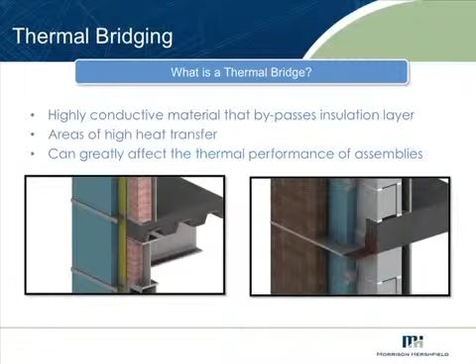Starting off, when we talk about thermal bridges, what we're talking about is heat holes - highly conductive elements that are basically going through the insulation layers on buildings and taking the heat out. If you've got a heat hole, it's kind of like putting a hole in a screen door. You can put a tighter mesh on, but the bugs are still going to get in. So that is the reason we're dealing with this.

Now, when I talk about this, I've been talking about these issues with architects and engineers for some time, and I try to make the point that there's a very big difference between complying with a standard and reality.

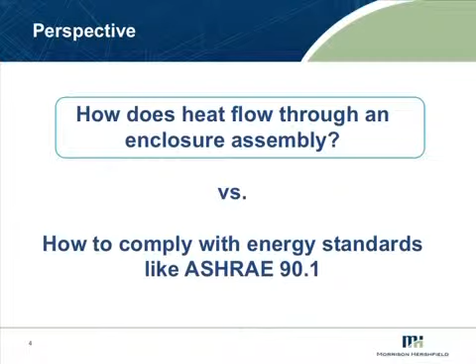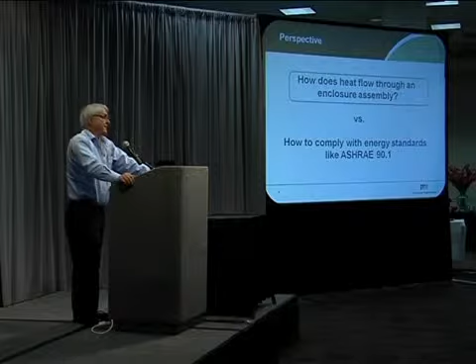To a large extent, I'm going to be talking about science and reality on this, and not necessarily what the words say about compliance with standards like ASHRAE. Clearly there's a relationship, but sometimes the relationship isn't very strong.

This shows in the fact that with ASHRAE 90.1, they basically don't deal with thermal bridges because it was hard. And it is still a little bit hard, but I think we've made it easier. And in fact, they have this 5% exemption - if something is less than 5% of the envelope, you can kind of ignore it. That's not actually what ASHRAE says, but that's how everybody's interpreting it.

And that means that if I put major pieces of steel running through my insulation layer, I can ignore it. Well, you may be fine for compliance, but not for reality. And we are trying to deal here with reality.

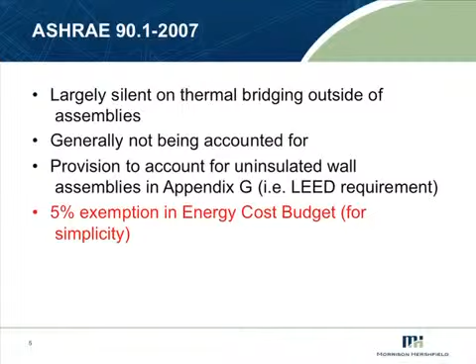There's been a bunch of talk about thermal bridges. Tomas was talking about thermal bridges and things like the psi factor. And maybe by the end of my presentation here, you will be sighing, but I'll try and explain that to you.

Typically, historically, when we talked about dealing with heat load calculations, we had things like the parallel path and the isothermal plane calculation methods in ASHRAE, which kind of work if you're dealing with elements that are relatively non-conductive. Things like wood frame, those kind of methods work quite well.

But when you start with steel and metal and concrete, you find that those things don't work because what you end up having to deal with is heat flow paths that are in 2 and 3 dimensions. Now we have software programs widely available, quite easy to use, things like Therm, which I think Tomas is going to be talking about next, which do 2-dimensional heat flow analysis to try and deal with this.

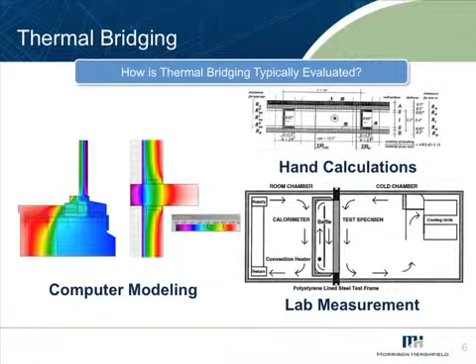But part of the challenge that we have right now is a lot of our details, particularly with steel and concrete, is when we're dealing with stuff that has 3-dimensional heat flow paths, and Therm doesn't deal with that very well.

Now, just to show you some significance as a setup, this is Table A3.3 of ASHRAE 90.1 that talks about what the thermal value, the U value or R value, of steel stud wall assemblies is. And this is one for basically a 16-inch frame wall, fairly common, 3.5-inch.

And basically what it's saying is if I put R13 into the stud space and I have sheathing inside and outside, it's saying I got R8. That's with all the air films and everything else that that wall assembly gives - I assume that I put R13 into steel studs, it's R8.

And then they had that funny term, if you remember on the tables, continuous insulation, which nobody's actually defined very well what it means. But what it says is if I put continuous insulation out here of R8, I'm saying that I'm going to get an R8 plus R8 - I'm going to get an R16 wall, which happens to be the kind of wall you would need for a steel stud wall in Zone 5.

I know Zone 5, I come from Vancouver. It's Zone 5, so you'll see a lot of references to that.

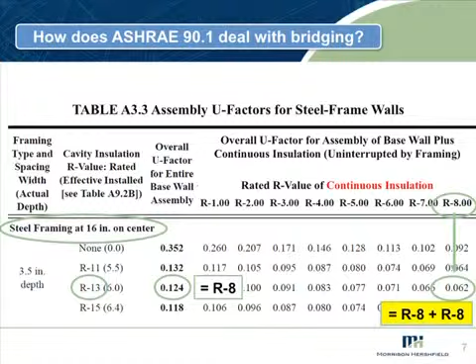But one of the things is that when you start looking at stuff, that gets to be somewhat wrong when you start looking at stuff other than the steel studs.

If you have a very simple analysis, if you just use concrete and tried to do a concrete slab with a wall above and below with an exposed slab edge, the typical way would be to do a parallel path heat flow equation, which would drop you down - if I put an R20 wall with a 6-inch slab, it's basically going to turn it down to about an R12.

Due to the heat bridging through the slab and with the steel stud, you see that it all cascades to the point that when we actually do real U value assessments or effective R value assessments of overall building assemblies, we're much less than those numbers that the ASHRAE tables give.

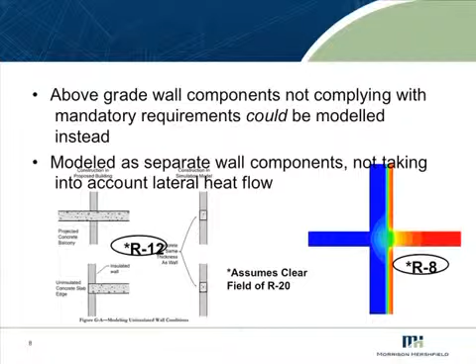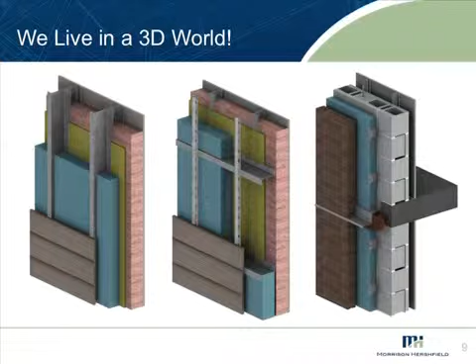A big part of it is because we live in a 3D world. The heat flow paths aren't parallel path. In fact, they're not even a two-dimensional heat flow path, they're three-dimensional. So ASHRAE recognized that, and they threw some money at us and we got some work.

What we did was sit down and try to calculate some common construction details: floor slabs, parapets, corners, window surrounds, base of wall details. Those kinds of common assemblies we have in construction. We looked at masonry construction, steel stud, metal buildings, and a variety of different assemblies.

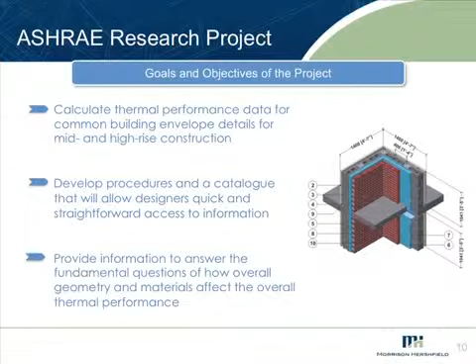Ultimately we did 40 different complex details, many of which included multiples of that, as this particular illustration here shows. We used three-dimensional finite element analysis.

It's actually a Siemens program for those who are real geeks, with an NX or a FEMAP solver. This happens to be the same software they use for structural design on the space shuttle, but we're using it from the thermal perspective.

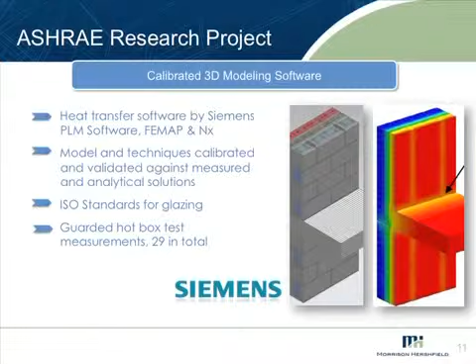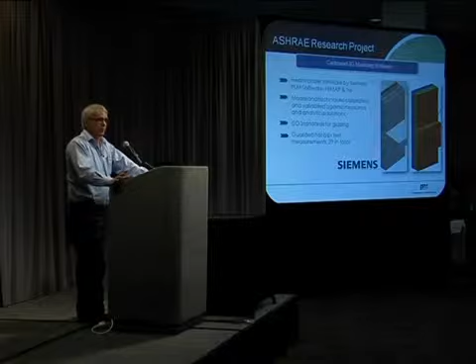We did a lot of calibration work against ISO standards and sets of lab data of known assemblies, and we came to a very close correlation. So we're very confident. There's always, when you're doing simulation, some reason to question it, I'm the first one to question the engineering. But I'm actually very confident that we're in a very close range here in real life. We've done sufficient work to make us confident with that.

We did 40 assemblies. These details are all published. You can get it from an ASHRAE report. It's a published report, and you can buy it from ASHRAE.

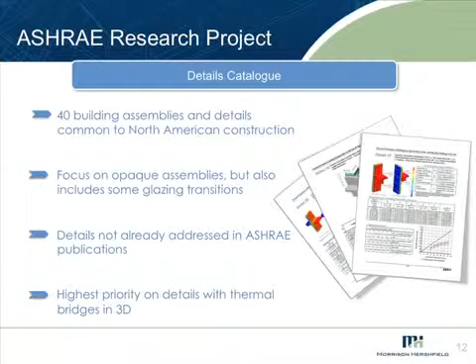Now we did a whole bunch of details. We did precast slabs, we were looking for the details, but interestingly enough we weren't quite sure how we were going to analyze the data before we did all these details. One of the interesting things is that once we got our heads screwed on right and we were doing the analysis, we learned a lot of stuff that's led us to believe we want to do a whole bunch more work, which we're actually looking at right now.

So we did precast details, we did masonry details, we did steel stud details. We did not do wood details. Why? Because we don't think there's a real problem doing the calculations there, and we were optimizing where we were headed. I could even deal with that.

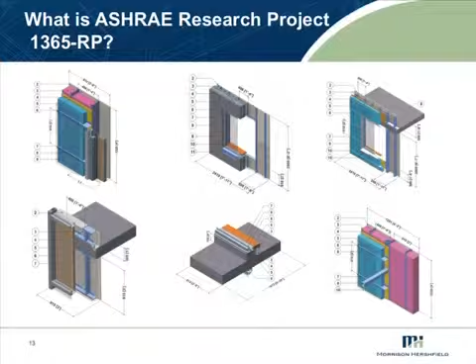Now, you heard the term psi value from Thomas. You're going to get a lot more psis as you look through your future life. Because one of the conceptual breakthroughs we made when we were looking at all this stuff and trying to generalize the results, since nobody wants to computer model every building they do, except perhaps the engineers who do computer modeling.

So what I basically want to get across to you is that you can think about the impact of thermal bridges in three categories. There are ones where the thermal bridges are so widely distributed that you actually want to modify the U value to get an overall U value of a wall or roof assembly. Then there are thermal bridges due to some linear assembly, think of a slab edge, a corner, a parapet, where it's smarter to understand how much heat loss there is per linear element.

The Europeans have been doing this in standards for a while, and they call that psi. It's another Greek letter, and that scares people, but it's really just linear transmittance. So instead of being based on area, it's based on the line. And if you go really smart, 1, 2, 3, well, I can even make it a point transmittance, and they have a term for that too.

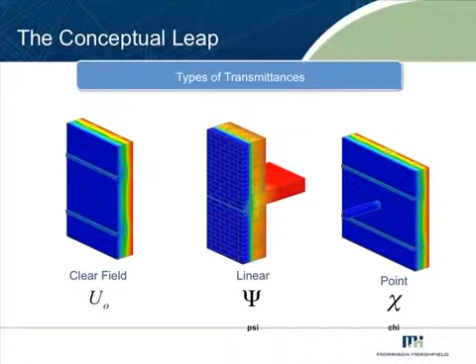It's called chi, right? Well, let's forget the Greek and use a linear point transmittance in terms of those details. Now the beauty of this is if you have a complex three-dimensional model that calculates heat loss, you can draw up an assembly in 3D, run it through the program, and get the heat loss through that whole assembly. Then I can do the same thing with the same type of system that doesn't have that element, in this case a slab. What's the difference?

That's the heat loss due to the slab. Now, what we've typically done in North America is try to attribute that to some set area of the wall, maybe a wall height or two feet. That's been the way we've been thinking, to modify the U value.

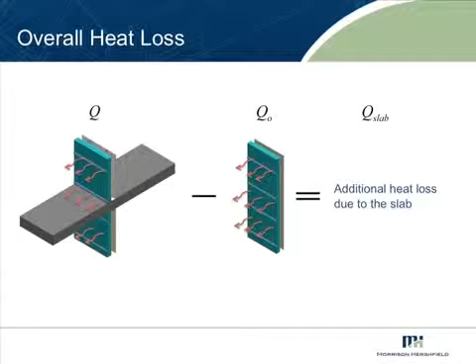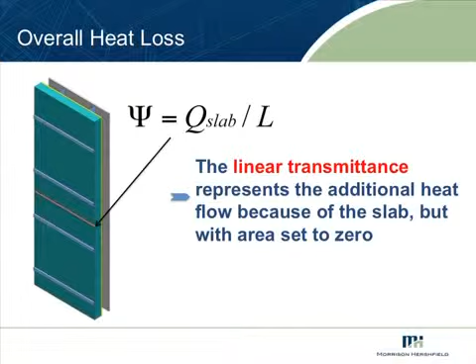Well, the beauty of what they've been doing in Europe is they say, forget that, why use area? I will ascribe it to a line that has no area. So when I want to find heat loss in a wall assembly, I look at the U times the A, that's the stuff for the clear wall without that assembly. Then I do the sum of my psi values, or linear transmittance values, multiplied by the number of linear feet of that particular assembly.

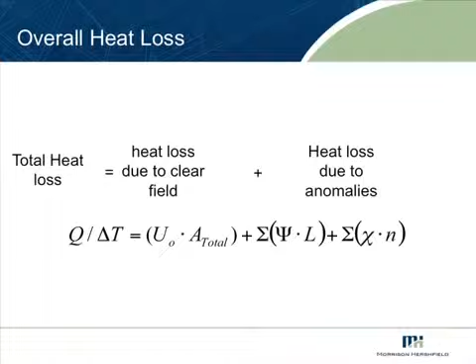And if I have anything I have to count, like a structural connection coming out of a roof to carry something, or out of a wall to carry a canopy, you just add them up. Once you add all that, you get the overall heat loss. And if you want to, you can divide that by the area and get the U value to plug into your program.

Or, more importantly, I strongly suggest that anybody doing heat loss calculations and takeoffs on buildings doesn't do that. They should carry the number with the heat loss due to those linear elements, because you'll see how big they are. We'll talk a little bit more about that.

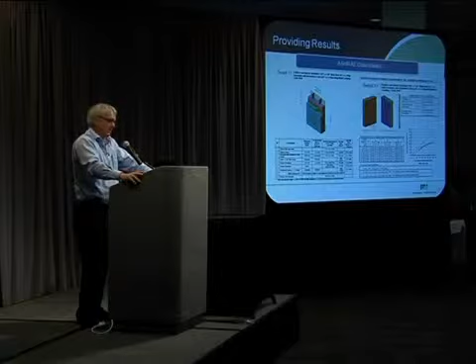So anyway, getting back, if you guys grasp that concept of using the linear transmittance and the point transmittance as well as the UA, I've done my job here. I go home happy, right? Because that is a breakthrough that I think we have to make in North America. So the only reason I'm talking here is I'm becoming an apostle of psi, right?

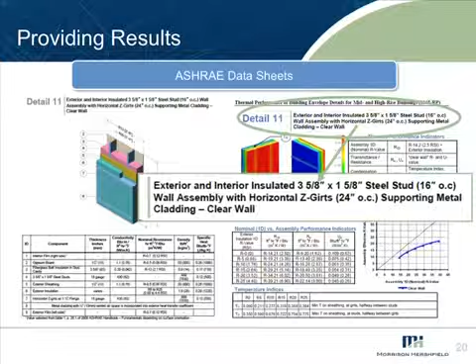But what I do have is, with the ASHRAE report, one of the things we did is we have these 40 assemblies. This happens to be a data sheet from one of them. We've got numbers here, information on temperatures, information on U values, information on the psi value and the chi value. Here's an example, a system.

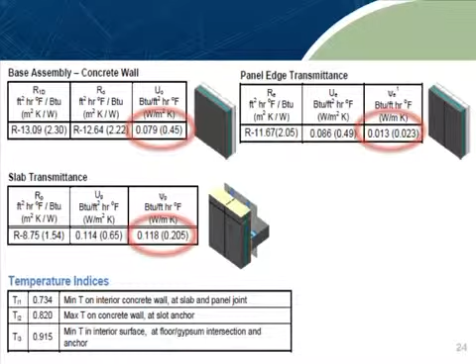The way we dealt with temperature is Thomas came up with a number, using I think it was theta or whatever. But we use the term in Canada, our temperature index. You probably, when dealing with windows, are used to doing the condensation resistance factor. That's just the temperature index. It's dealing with the surface temperature.

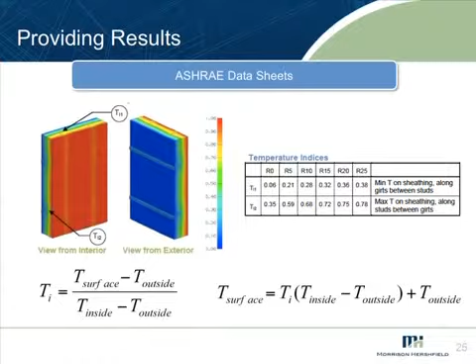So we actually plotted stuff using temperature numbers, and gave temperature indexes of some of the critical surfaces. This is all in the report. I won't make you do any calculations. And for any of you who are the real geeks who have to do this, get the report and you could look at these numbers.

And we're coming up with some stuff, and I have some bite-sized pieces of information at my table over there. But here are some numbers that I've just plucked out of the results that I think are good touchstones for you to learn from.

One of the things we're dealing with a lot: many of the wall systems require carrying the cladding through the insulation. In other words, the structure is inside and we're carrying the cladding, so we need some kind of framework system to do that.

We do a lot of this in Vancouver. This is a standard wall type for many of the high-rises we deal with. They'll have either steel stud backup or whatever, and then a lot of contractors just do vertical Z-girts, or Z-girts as you'd call them.

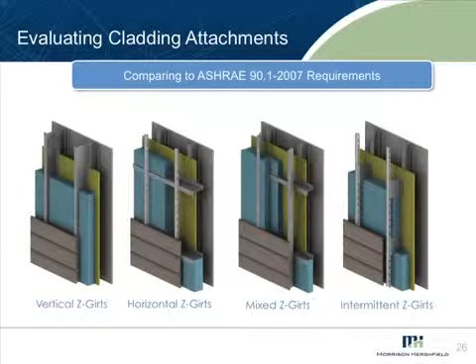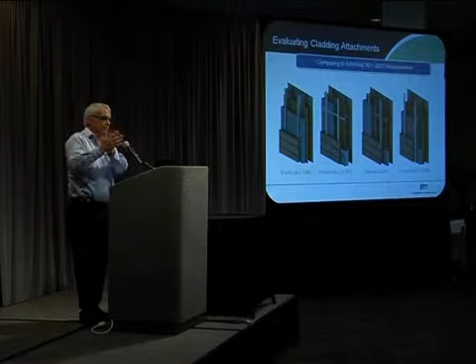They can be run vertically, which is structurally very efficient but thermally not so much. We can do it horizontally, or do something horizontal and vertical with different layers of insulation to lengthen and toughen that three-dimensional heat flow path.

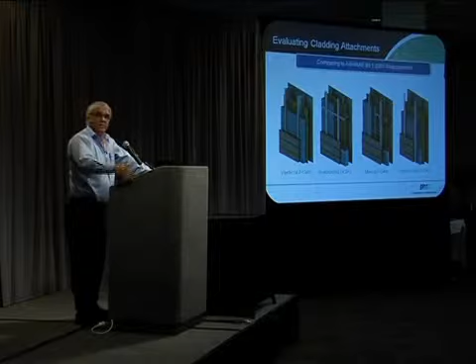Or we can minimize the amount of metal going through by using a clip system instead of girts that go all the way through. Or we could spend money on proprietary systems we're coming up with, like Knight Wall.

So we modeled a bunch of those systems. The ones you're looking at here, all the ones that are not proprietary, I've marked with a line. What's really important is if you look at it—

Do we have the pointer? Is it here? I could do without it. I guess I will. But if you look at the number here, looking at the R20 insulation along the bottom—

That is the nominal R value of exterior insulation. So these are all on steel stud assemblies with no insulation in the cavity. These are all exterior insulation.

You put R20 on, and if you look at something that's just vertical girts, if you do straight continuous vertical girts, you're only actually getting about R11.

If you use horizontal girts, you're getting a little bit more—you might be up to R13, or R15 if we're dealing with horizontal and vertical with two layers of insulation.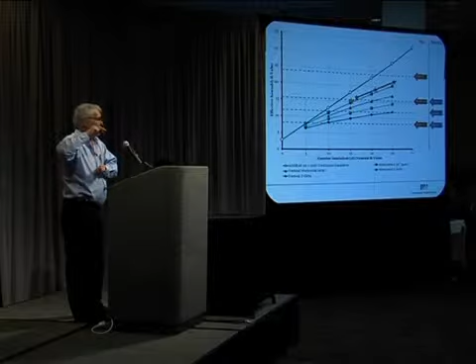And then this line happens to be a clip system with a 6-inch clip every 36 inches. The red stars, that's the Knight Wall system. And this is a fiberglass clip you've probably never heard of—it's a proprietary system in Vancouver.

And the black line is the line of what ASHRAE says you get with continuous insulation. So this is what you get meeting the requirements for compliance with continuous insulation, and here's what you're actually getting in reality. There's a significant difference.

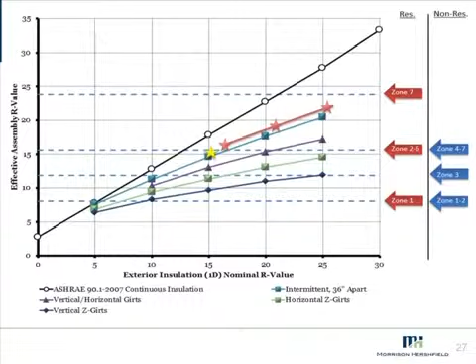So get this in your head: continuous actually means very little metal through the insulation. You can probably get closer if you're just using screws or fasteners—there are ways of doing that. But if you're actually getting a structural connection, you have some challenges.

We do a lot of curtain wall and window wall, and this is one area where we're getting a lot of misunderstandings by architects. This is the spandrel section of a curtain wall—a very common stick-built curtain wall. I won't mention any names that start with K.

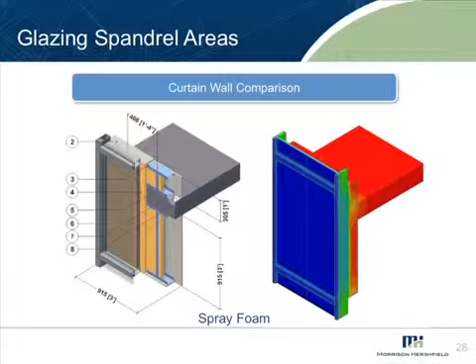But there's a back pan with insulation in the back pan. And because people know these systems really suck thermally, we sprayed foam insulation on the inner face of the back pan to up the insulation. So the question is, what do you get?

Now here's the curve. The first thing I want to get across to every architect looking at curtain wall: if I move from R5 insulation in the back pan to R25, how much improvement do I get? This is called the law of diminishing returns when you have big heat holes called a frame.

You can add all the insulation you want in the back pan, and you're not going to improve your thermal values by very much. There are some ways you could do this, some isolating back pans and stuff like that, so you're not dealing with the frames, but that raises condensation issues in its own right.

And furthermore, as I said, in the model we sprayed the inside of the back pan with 2 inches of closed-cell spray foam insulation, which is about R12. How much did I get? About R4. So it did some good, but not by very much.

And there are places where we do spray the inside of back pans on some things to up the value. But why is that only a small gain? Because when you think about it, in the vision section of the curtain wall, I've got the windows and the exposed frame, that's sucking heat in, and then taking it down in the lateral path downward to where the insulation is.

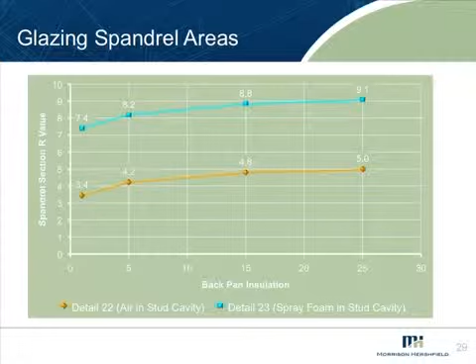Past the insulation, I bypass the insulation with the frame, and there's no way around it. So when I see buildings with 85, 90% glazed area, whether it's got back pans or not, and I hear that and I hear LEED, I start to cringe. Because there's no way, unless you're lying. So that's kind of the point I'd like to make.

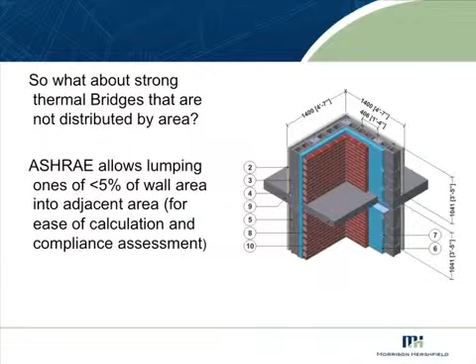No, those are dealing with issues that relate to the area of the wall. We're talking about modifying the U value, if you will, the effective R value. I want to shift gears and start talking about some of these linear elements we're talking about, the stuff that's handled by psi.

This is the dirty secret in Vancouver. If anybody's seen pictures of Vancouver, we have lots of buildings that are concrete, and they're interior insulated concrete. It's formed concrete. And I bet you, thinking about people who are talking about blast and stuff like this, is the concrete bunker with interior insulation. I bet you there's a few running around in Army properties.

So for some reality, an R10 wall has a U value of about 0.1. So if I show you a number that says the heat loss is 0.47 BTU per hour per linear foot, that's the same as having 4.7 feet of R10 wall, or a little over 7 feet of R15.6, which, back to what I said, is basically what you'd require if you were in a zone 5.

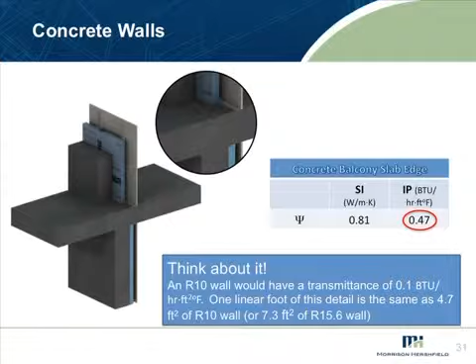So if you have this condition where you've got a poured concrete building insulated on the inside, this happens to be an 8-inch slab, 7.5 inch actually, because that's what we build in Vancouver to get the cover, that's like adding 6-7 feet of your wall. So you just raised your building in terms of its area.

I mean, that's a fairly dramatic concept. So I can tell you that in terms of the modification of the U value, but if I told you you just raised the building, your wall area, by 5 feet, it's a different thing.

Now, another interesting thing, just so you get some perspective of what the change is. Here's a very simple wall where we just took our exterior insulation and ran it past the edge. This one happens to be different, it's a steel construction. And we all know that isn't a particularly good detail, the way that beam is handled. But I went from, this is 0.09, so this is less than a foot of my R10 wall. Right? So this is not fancy.

This is, I would suggest to you, the minimum you should be aiming at for a number, for a psi value. And it's basically less than 20% of what we've been building in Vancouver.

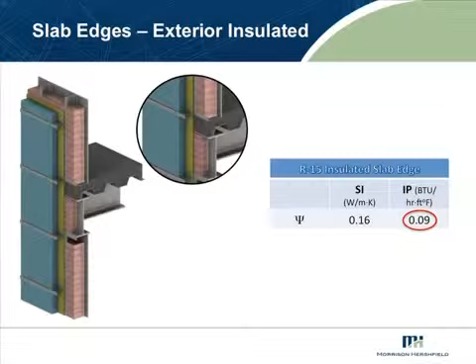Another interesting thing is everybody talks about these balconies and everything else. Well, we did a fair amount of analysis for that because we have a lot of these balconies, since most of the work we do is actually high-rise residential. And we also have eyebrows, these little things that stick out, which were thought to be a good idea for rainwater protection and shielding. And then a simple exposed edge slab concrete building.

There's no significant difference in the heat loss between those. It's so bad that the insulating value of the concrete on the bigger ones makes up for the difference in the fin effect.

And that's because your slab's already connected to your exterior wall, so you've already got your fin. You add a little bit more fin, it makes no real difference. So they're all the same. So don't necessarily blame all those ugly balconies if you've got an exposed slab edge. If you haven't insulated the outside edge of your frame, you're already messed up.

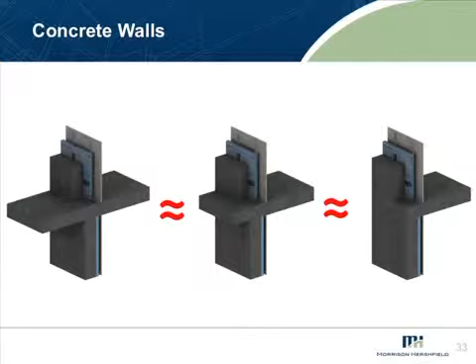So here's just a few other numbers very quickly. Here is an exterior insulated block wall assembly on a balcony, quite common in residential high-rise construction. We're down to 3.4 feet. If we do a shelf angle that's bolted to the slab edge or cast into the slab edge, 2.7 feet.

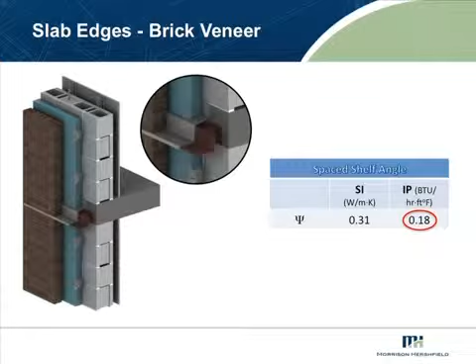If we put knife edges in and hang the shelf angle off and put the insulation in behind it, we're down to less than 2 feet. Makes quite a big difference when you consider this. It's actually cheaper to do this than to put the big shelf angle to support the masonry weight, because you can use a smaller shelf angle.

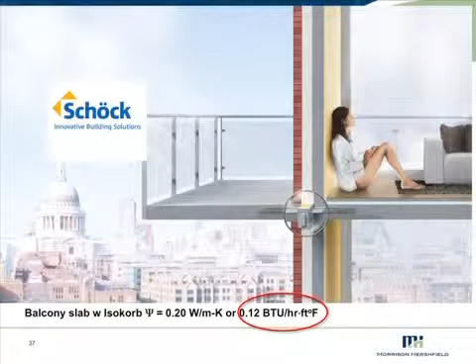This particular slide is for a product - a German product, commercially available, that is an insulating structural assembly you can put into a slab edge, and it will take the moment loads of the slab. It's over-engineered, German, and expensive, but it works, and it works very well. It's now being sold in North America because I can't get the guy off my doorstep.

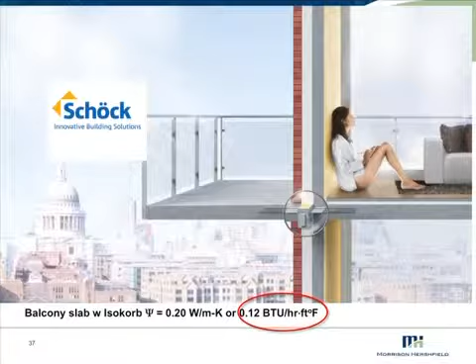This is a product whose time has come in terms of residential construction because it's a way of isolating the balconies. Virtually every building, every balcony in Germany or Switzerland probably has some version of this assembly now because they have specific requirements for psi values for these things.

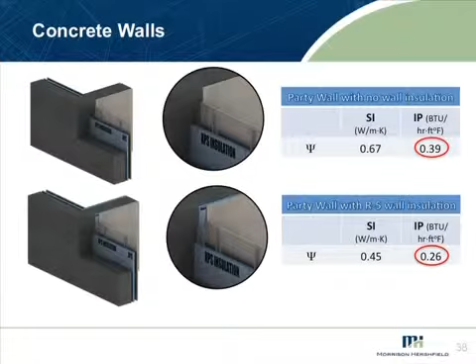Concrete walls - what's the difference between a concrete shear wall and a slab? Orientation. I don't care what your orientation is. But the interesting thing is there's a subtle difference between these two. This one here we've just brought the insulation in, and here we've brought the insulation and then brought it in 2 feet into the wall, just the length, basically next to the heat flow path. It makes a difference, but not as much maybe as one wants, right? But that is one way of isolating things.

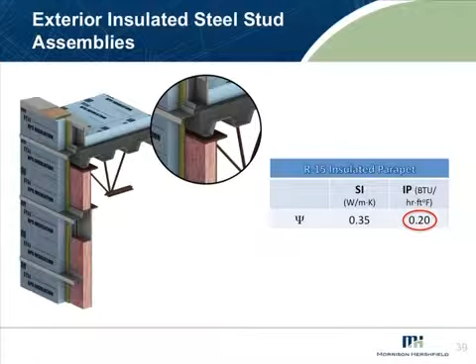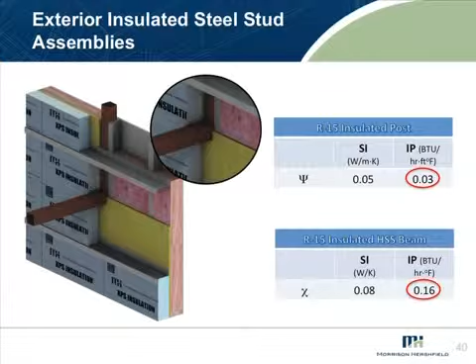So we have these numbers. I've got some stuff at my desk, some of the stuff that I've drawn slides from, in sort of bite-sized pieces that we've given to architects and the like. Or you can get the ASHRAE report. I also have a copy of the appendix that has all the details that we looked at. If anybody wanted to flip and see what details were there, they can come over and just flip through it, and then they can go order it.

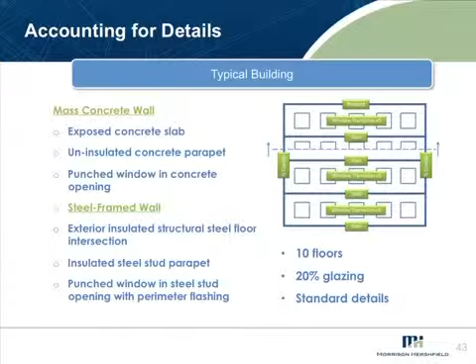We did a lot of work looking at things to understand the significance of this. This is just a dummy building, 10 stories high, 20% glazing ratio, and we've got obviously slabs and stuff like that. We looked at 2 different things that comply with the 2007 version of ASHRAE in Vancouver's climate - one was an interior insulated mass wall, and the other was basically a steel stud wall with exterior insulation. We did the thermal analysis of that.

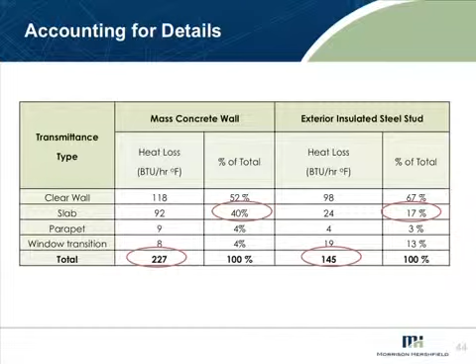The interesting thing about that is when you look at it, the numbers I want to point out are that the concrete building has almost twice the heating energy use - this is not R value, this is heating energy use - almost twice that of the exterior insulated assembly. Even though the exterior insulated assembly is not a very good assembly because it's got all that thermal bridging inside it. Almost 40% of that was going to the slab edges. We were very surprised at how significant the slab edge effects are, and I'm not new at this game, and I was surprised.

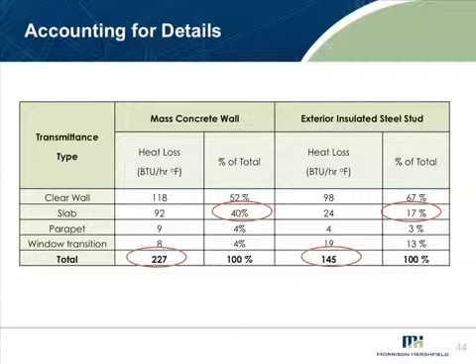We thought we were going to get R11 with the mass wall - we got R7. We thought we were going to get R15.6 with the steel stud assembly, and we got R11. This was another big surprise.

The Metal Building Association asked us to model insulated metal panels because they're so good - they just wanted to prove how good they were, and they were. But they also said that at every through-wall flashing or all the windows, you have to put a metal flashing that went past the insulation and attached to the metal frame behind the insulated metal panel. So that's a thermal bridge - every flashing is a thermal bridge. And that basically kicked it from stuff that was basically up at R21 to R8.

Now that's a big deal, but the good news is it's very easy to fix. And certainly with insulated metal panel, when you've got no structural element - the structural assembly that holds the cladding on is fully insulated, there's no thermal bridges through the assembly. That makes them a very good choice for high efficiency.

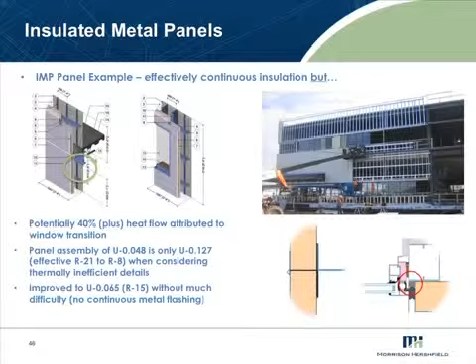Now there's a couple of things when looking at overall heat loss. While I think it's important that we understand the impacts of thermal bridges, we also have to make sure we understand the importance of other factors.

This is some modeling we did to look at how effective thermal resistance affects overall heat loss and heating energy use in a building. You find there's a law of diminishing returns. If you get walls up to the effective R15, R20, and then start adding more insulation, you don't gain much more.

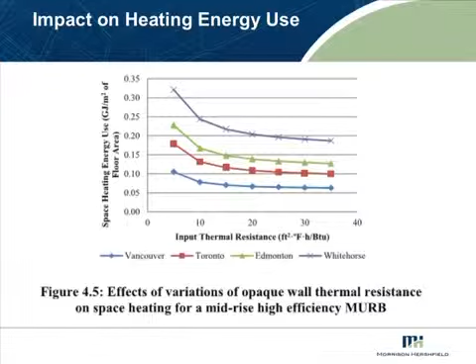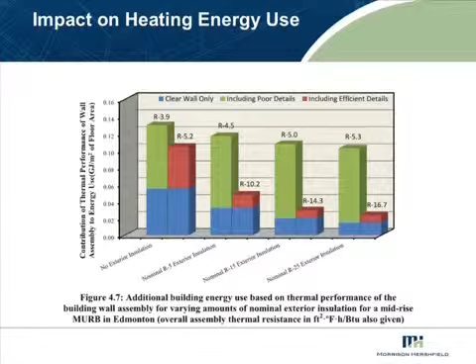What you end up finding is, because a lot of the good thermal details with thermal bridges actually involve putting insulation on the outside, as you get to better walls, the difference between having a good or bad detail at things like window surrounds and slab edges becomes a much bigger deal in the overall performance of the wall assembly. So as you start removing thermal bridges, you almost multiply the effect—it's a synergistic effect of getting good effective R values and low energy use.

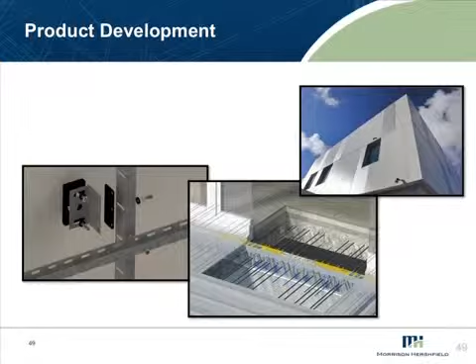That said, looking at the future, we've got products coming out. I mentioned the Isokorb thing on the bottom corner, the Knight Wall you can go look at over there. We've got insulated metal panels. There are products out there—we're not necessarily always having to figure it out as we go along. There are some pretty good products that help us a lot.

And this is one thing I want to leave with all the architects. It's not necessarily related to what I'm talking about, but we took a LEED compliant building and modeled different heat loss, heating energy use, and total energy use by varying different things to show the sensitivity of the results.

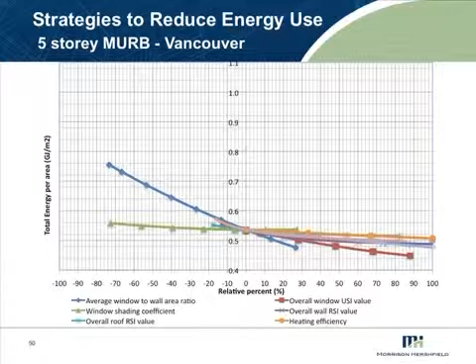One of the things that bothers me is that if somebody decides they want a high window-wall ratio, somehow or other we have to claw back gains from all these other things to get down to compliance levels.

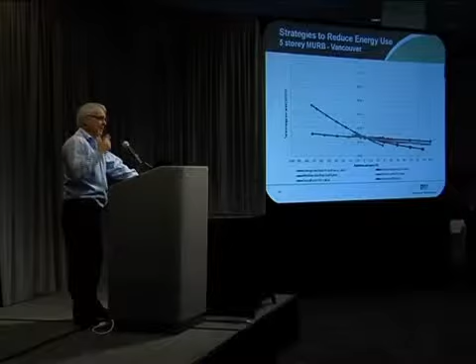And I'm getting very frustrated with architects that say, I want 80% glazing facing north and west, because that's where the views are—the mountains to the north in Vancouver, the ocean to the west. So I want 80% glazing on those faces, and somehow or other you're supposed to figure out how we're going to comply with ASHRAE 90.1 or any of the energy standards, right?

So a bunch of things tie in with what Thomas was saying. We're talking about the psi value being a very important concept to understand. And secondly, the window surrounds, the slab edge details—these are details you really have to look at, because if you're just taking the tables from ASHRAE without considering that, you're way off on reality regardless of what you are on compliance.

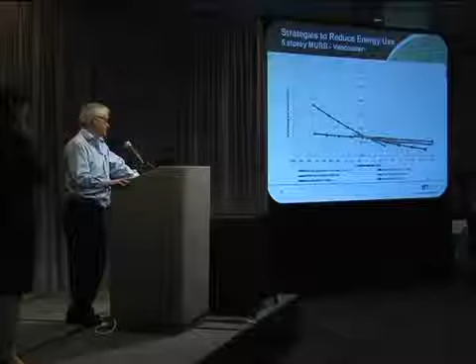I'm Chris Draper, and I work with Mark Lawton out of Seattle, and Melinda here is out of Atlanta. I wanted to mention something before Mark ran out of time, in terms of some of the things we're seeing down here in the U.S., where this is being applied very quickly. We're getting a lot of requests recently from GSA, as well as some architects who do work for the U.S. Army Corps of Engineers, where they're trying to comply with the new energy efficiency requirements that we know you're all under.

What this has really helped us do is isolate the conditions where we need focus. With all of these details, we don't have to model every building—we're really able to say, okay, here's the building design, and here's where the problem areas are. Let's focus on that and figure out how to minimize thermal bridging at those locations. We've worked with some of the architects who do U.S. Army Corps of Engineers work down here on this side of the border as well.